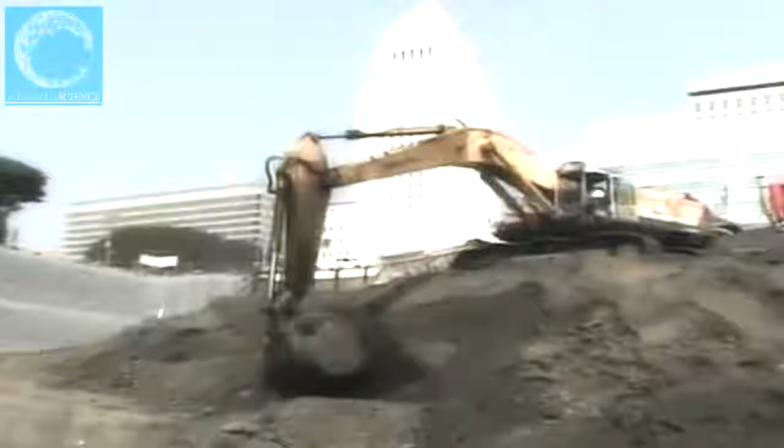Past year, 8 months, and 20 days, the builders of the new California Department of Transportation headquarters in downtown Los Angeles have been busy pouring concrete, erecting steel, and installing walls and windows. The massive 750,000 square foot office building looks almost completed from the outside, but the structure is still pretty naked on the inside.

It'll take another 7 months to finish installing the heating, ventilation, and air conditioning system and elevators. These are the things that make working in a large office building possible, even bearable.

Beyond the introduction of steel cage construction, no invention helped buildings, including our own, climb higher than the elevator. If we did not have passenger elevators, we don't have the modern multi-story office building because people won't walk more than 2 or 3 floors off the street to easily reach an office.

The Caltrans building will have 19 elevators to shuttle its 2,000 employees to upper floors. Kone Incorporated will soon begin installing them. But in the meantime, Clark Construction is running a temporary man lift to move workers and materials.

At the helm, Bobby Jeffers, man lift operator extraordinaire. Yeah, you see, you guys, this is a man lift operator's life. You're always getting loaded and you're always having your ups and downs. I've been running the man lift for 25 years all over Southern California. I've built hundreds of buildings. I'm the main person that brings everybody up. The job won't run without me.

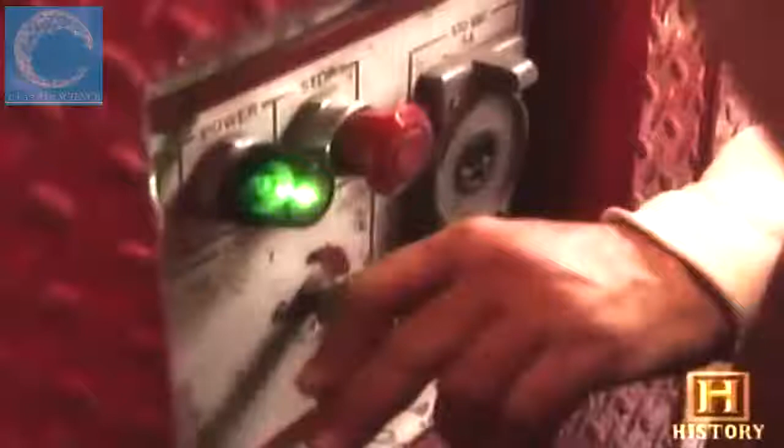The site uses an operator for a more efficient flow of materials.

Okay, if I take you down, can I get a nice smile out of you guys? Okay, you ready? Okay, hang on. Hang on, baby.

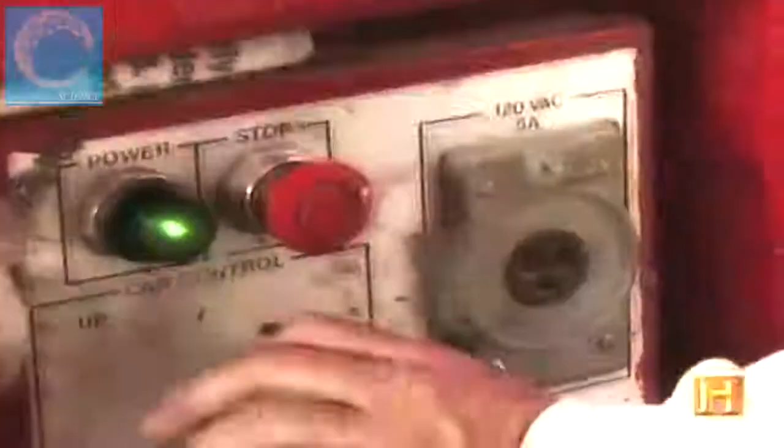Bobby's man lift will only operate until the first 2 permanent elevators are running.

Like most of the elevators used in high-rises, these are what's known as roped traction elevators. There's the elevator car. Cables are attached to the car, go up to the top of the shaft, and then over a pulley or sheave, and then back down the shaft to a set of counterweights to balance the car. Attached to the sheave is an electric motor, and when it operates, it turns the sheave or pulley, and the car goes up or down the shaft.

Okay, we are in the pit. This is the bottom of the elevator. At the Caltrans site, Ron Caborn with Kone Incorporated is responsible for getting all 19 elevators up and running.

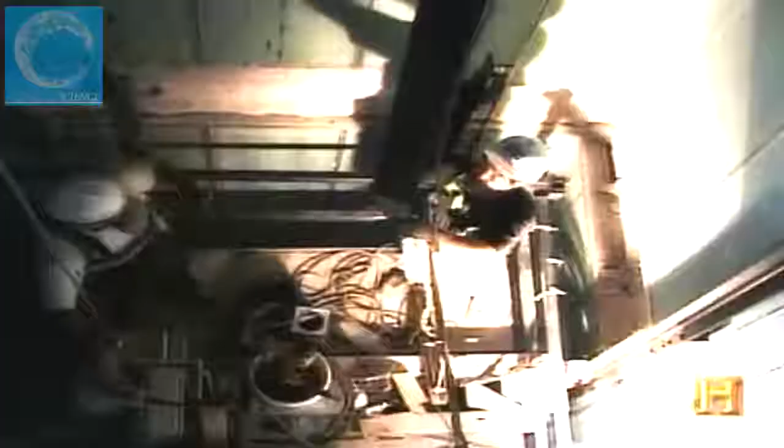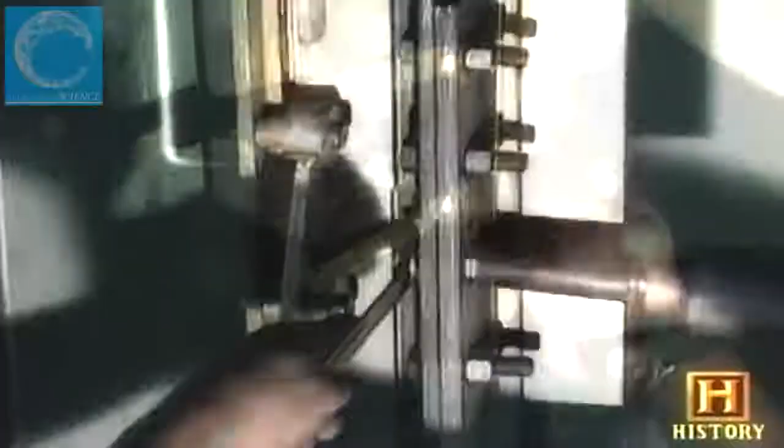The first step in the installation process is to attach the guide rails to the sides of the shaft. Our main part of the elevator is our guide rails. This is what the elevator travels on. It's very important that the guide rails are plumb.

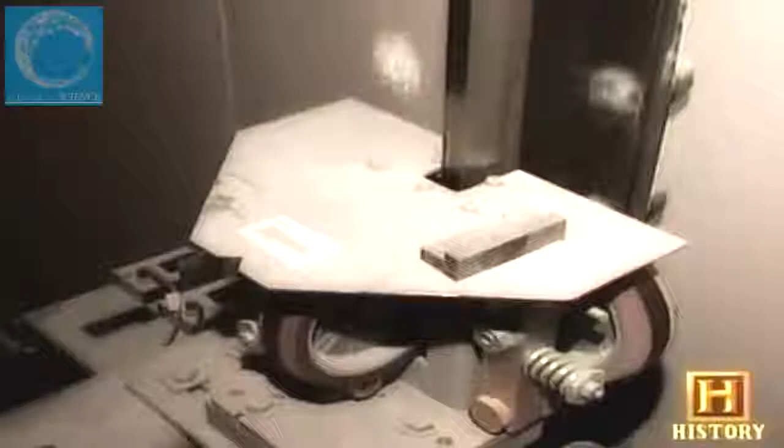Anything crooked in the rail, the faster the car travels, the more you'll feel it. These cars travel 500 foot a minute. It's not a real fast car. It's not real slow. It's kind of in the middle.

Electric traction elevators are the most prevalent. They're called traction elevators because it's traction between the motor sheave and the cables that lifts and lowers the car.

Okay, we are in elevator 17 machine room. This is on top of the hoistway. This is our hoist motor, which we have the drive sheave under here with the hoist ropes on it. As it spins, it picks the car up and down, counterweight up and down.

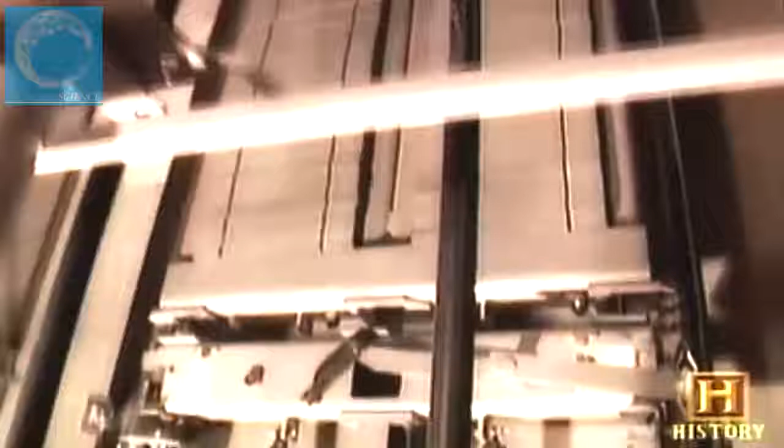The counterweight on this elevator weighs about 12,000 pounds. That's the weight of the car, plus 50% of the car filled to capacity. This helps ease the amount of work required by the hoist motor.

Right now we're roping up our cars using this elevator steel cable. We're starting out with the spools up at the very top, letting in one dead end all the way down, feeding it through our counterweight sheave. Then we're attaching it with our rope, and they'll pull it all the way back up to the very top where they put a shackle on it and hitch it up to the hitch plate.

The Caltrans job is going pretty smoothly. Then, one of the elevators hits a bump.

After successfully roping 8 elevators, the ropes from one have unexpectedly jumped off their sheave. Dangling over an open shaft, the engineers try to sort out the tangled ropes and get them back on the sheave.

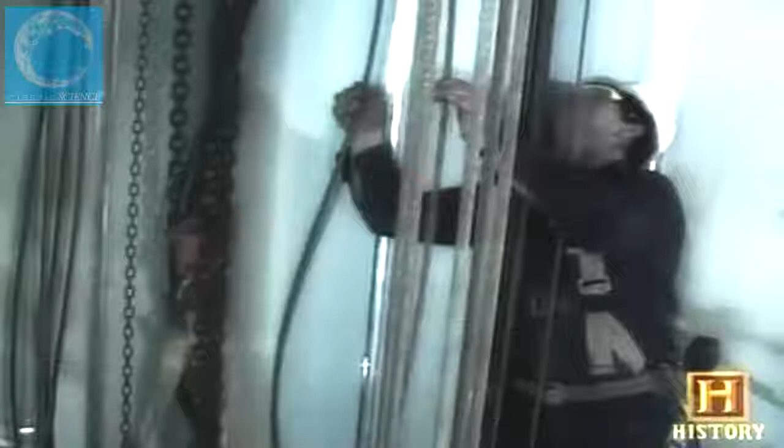Okay, this is 1. Yes. This is 2. Yes. Okay, establish the next one. Wait, this one I'm shaking. Look where I'm shaking, this one is 1. Let me spell it out to you. Grab the number 1 right here, put number 2 right here, so I can get 1 and 2 in order here, because I can't see it.

The engineers worked 2 days to sort out the problem. It was quite a project to fix it. We did have it all back up and running again. We noticed the ropes were damaged, so actually we have started replacing them. We have to put all new ropes in the car.

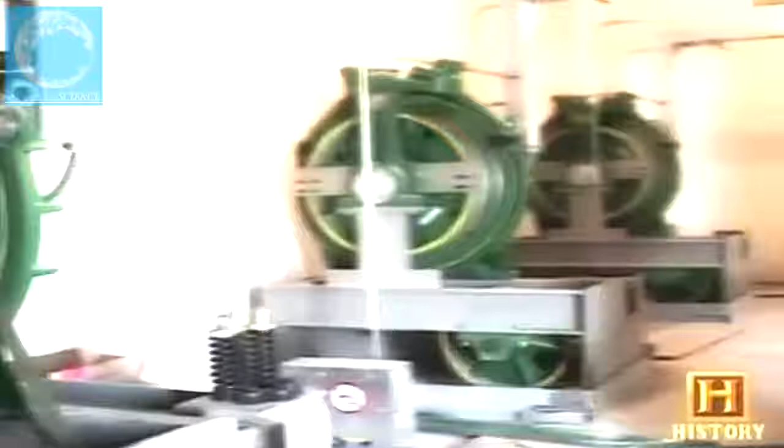Besides the hoist motor, the elevator computer, or controller, is also located in the machine room, above the shaft. This here is our controller. This is the brains of the elevator. It tells it what to do. It monitors what it is doing.

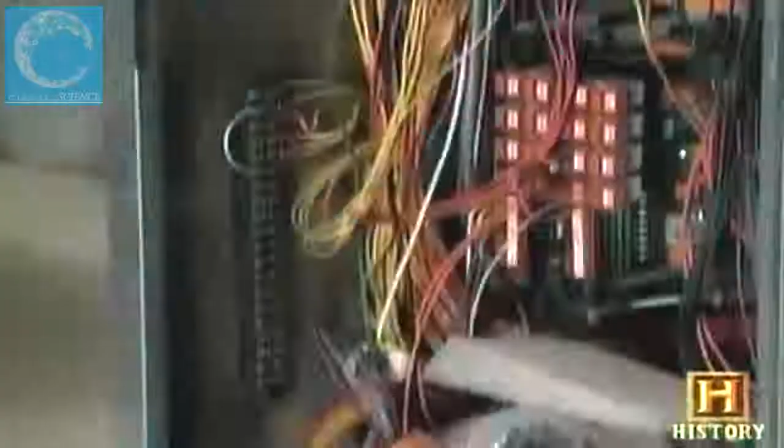The computer tells the car what floor to go to, when to open the door, and on some elevators, how much weight just stepped onto the elevator. And believe it or not, the door close button is actually connected to the computer. The controller also regulates the speed of the car.

One of the biggest fears people have about riding in an elevator is a sudden uncontrolled free fall. It's simply the misconception or misperception we have of elevators from television programs and movies where the cables are constantly breaking and the car plummets sort of helplessly down to the shaft. That is almost impossible given modern safety devices.

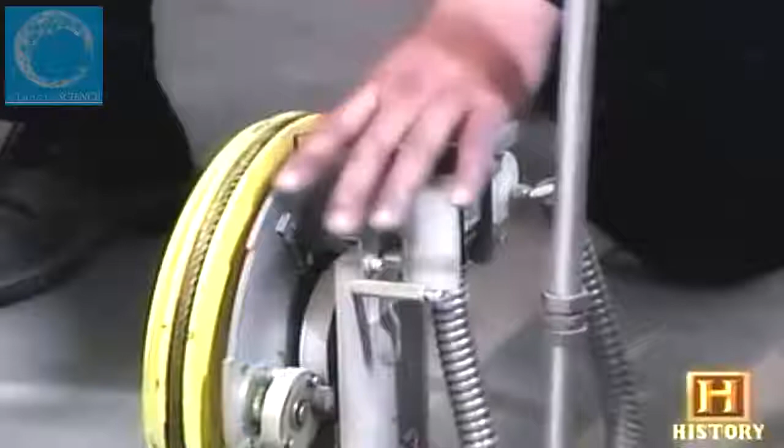One of those devices is the governor, which monitors the speed of the car. If the car were to fall and go faster than it's supposed to, it will recognize that and stop the cable from spinning.

There are also safety brakes under the elevator car, which clamp down on the rails to stop the car in the event of a fall.

If all else fails, there's even a cushion in the bottom of the pit. So we have a hydraulic buffer here. If the elevator were to fall down the hoistway for a short distance, this hydraulic oil buffer will catch the car. This thing compresses. The faster the car comes, the faster it will stop the car.

With all the safety mechanisms, there's really no need to worry about an elevator plummeting down a shaft. But that hasn't always been the case. Elevators used to be slow and sometimes dangerous, yet luxurious. Still, this economically uplifting invention would change the rules of real estate.

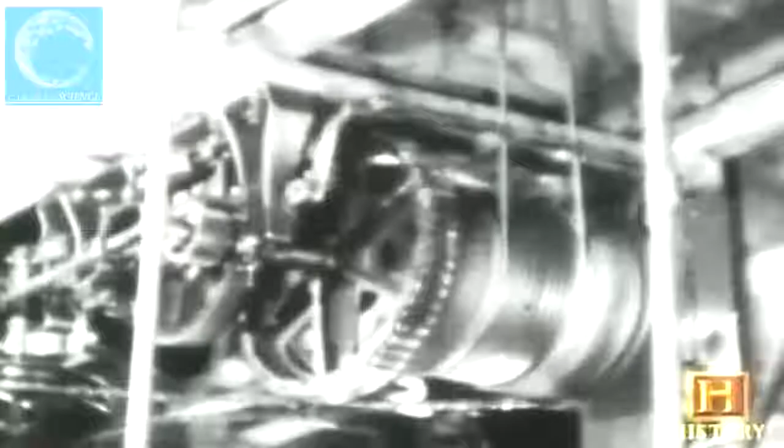The benefits of elevators were clear, but several deaths caused by freight hoist accidents proved elevators weren't yet safe for transporting passengers.

Enter American inventor Elisha Graves Otis. In 1852, Otis installed the first hoist with a safety brake in a factory. The following year, Otis demonstrated his new invention to the public at the Crystal Palace Exposition in New York.

He would have the platform lifted up, and Otis would be standing on it, and then someone would cut the hoisting cable, and the car would fall, and then his improved brake would catch and stop the elevator car, and he would be safe. Spectators were astonished.

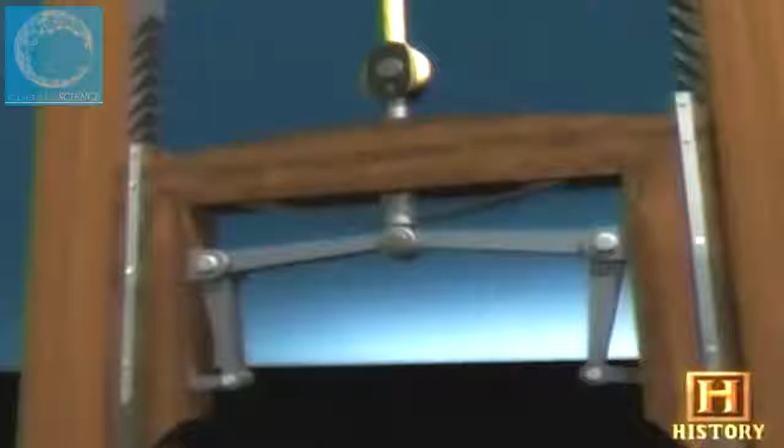The Otis safety brake consisted of 2 wrought iron catches on the car and cast iron teeth on the guide rails. If for some reason the hoist rope broke or slipped, a spring tripped the catches, forcing them into the teeth on the sides of the shaft, stopping the fall.

This simple but ingenious device made elevators safer for moving passengers.

Soon, the first passenger elevators started appearing in department stores and luxury hotels. The elevator was introduced as another luxury item, literally as a movable room with upholstered seats, mirrors, chandeliers, and an operator. It was that gracious moving room that carried patrons of the hotel from floor to floor. But the elevator quickly changed from luxury convenience to economic necessity.

The new invention now made taller buildings feasible, altering the economics of real estate forever. Developers soon realized the new elevating device could also elevate office rents.

19th century New York's primary mode of transportation was horses. Because of the horses and other activities, there was a lot of dirt, noise, and smells, and being above that had an obvious advantage. With an efficient means of getting people to upper stories, the top floors, which previously had been less desirable, suddenly became the most valuable space.

The first commercial office building to employ an elevator is the Equitable Building in New York City, completed in 1870. The trip from the ground floor to the 9th floor, the top story, took just under 2 minutes. The business community was highly skeptical because this was a slow and gracious device placed into the fast-paced world of American business. There was a recognition that the elevator had to change if it was going to be successful, and it doesn't take too long before the seats begin to disappear and the elevator starts to move much faster.

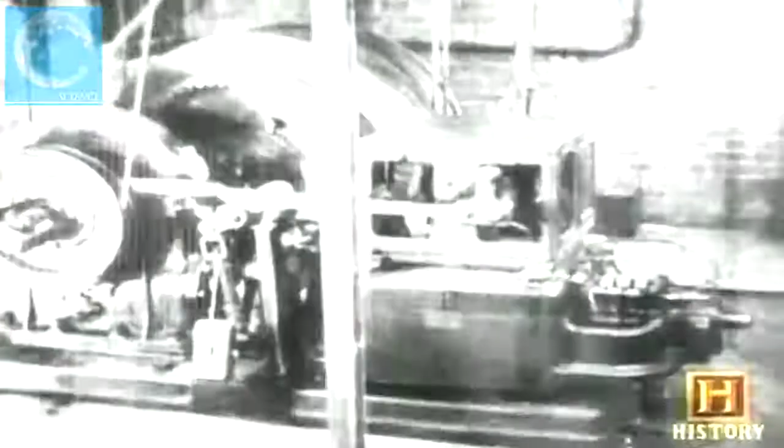Over the next 60 years, not only did elevators become faster, but safer and more reliable. Electric traction motors took the place of steam engines. The first push-button automatic elevators started appearing in the 1920s, making elevator operators obsolete.

There was a surprising amount of skepticism about operatorless elevators. People did not want to run them themselves. They viewed this as too complicated, which sounds very strange to us because they looked the same. Many elevators had buttons very similar to today. Today's elevators are a far cry from the slow, moving rooms of the past.

Elevatoring is probably the most important thing for a very tall building. If you don't get the people up there, you don't have a building.

Builders of the new Taipei 101 in Taiwan faced greater challenges than normal when designing the ultra-sophisticated elevator systems for the world's tallest building. In a structure this large, just getting people in, out, up, and down presents unique challenges.

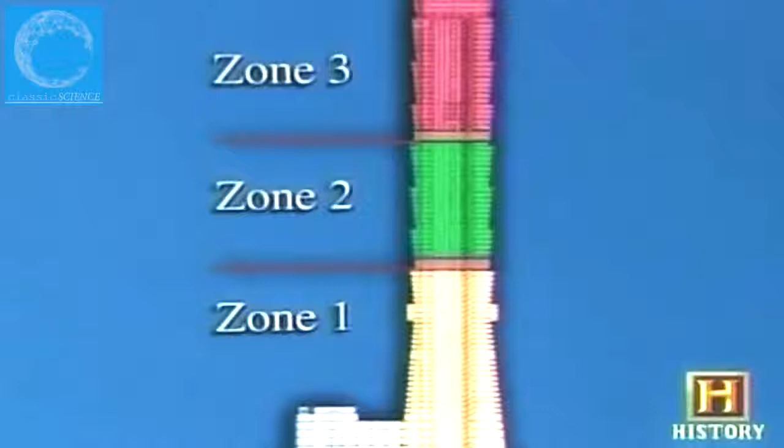We know it's important to transport these people to the floor they intend to go to in a short time. Therefore, we divided the vertical transportation system into 3 zones in order to make transportation go more smoothly.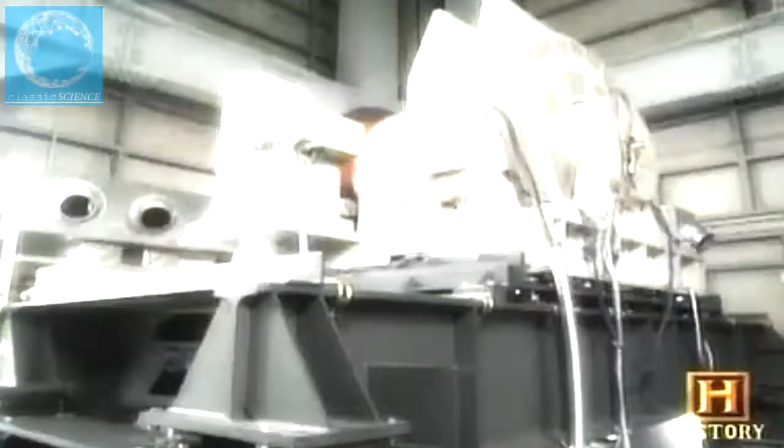First of all, we must have a very powerful motor. Secondly, we need a little damper in the cab so that it will not move around too much. Under each cab is a vibration balancing system, which uses sensors to quickly move weight back and forth to counteract vibrational forces.

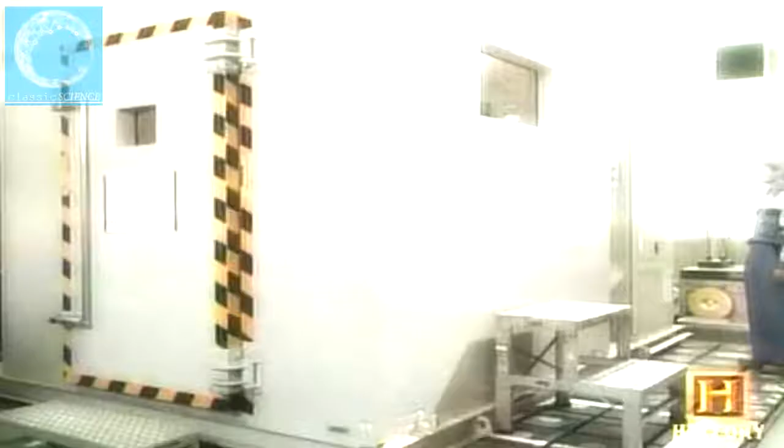Thirdly, we need to pressurize or depressurize the cabin in order to give people a more comfortable feeling on their ears. Pressure chamber testing helped determine what was comfortable. The 2 express elevators move so fast, they're pressurized on ascent and depressurized on descent. To avoid a sudden change in atmospheric pressure, each cab has a high-pressure blower and exhaust release control system.

Engineers on the Taipei 101 have pushed elevator technology into the stratosphere.

Back in Los Angeles, the elevator mechanics are making good progress on the Caltrans building's 19 elevators. After 4 months, the first 2 are already up and running.

They make Bobby's rig obsolete.

Last week, Friday, right? Yeah. Are you gonna miss me? Oh yeah, everybody's gonna miss you around here, Bobby. This guy's worked with me since back 20 years ago. He come in the elevator and said, hey, what?

After 42 years in construction and 25 years as a man-lift operator, Bobby's retiring.

Friday will be my last day, January the 16th. 42 years, it's all been good. I've helped put a lot of buildings up. I've brought a lot of cheer and made a lot of guys feel good about themselves. And it's been great, I'm gonna miss everybody. They all been like my second family.

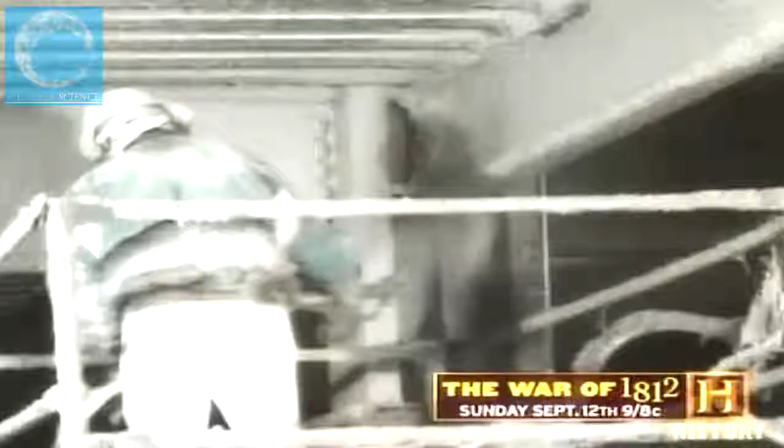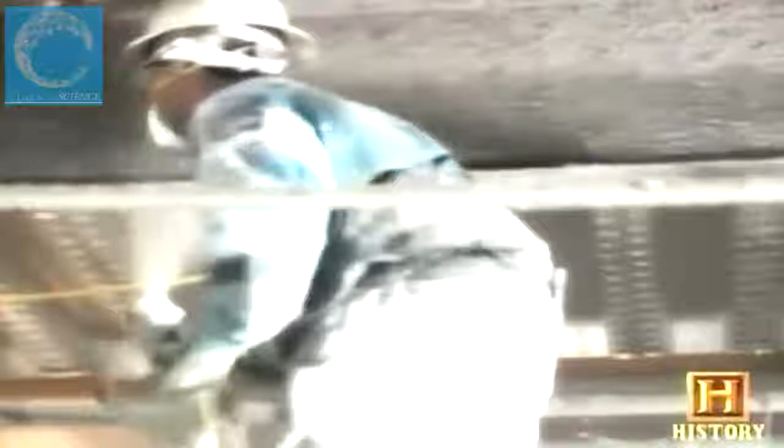One way engineers protect the structure of a building is to apply fireproofing to the steel skeleton. On the Caltrans building, fireproofers spray a coat of Monokote MK-6 on the exposed columns. It's a gypsum-based, cement-like material that goes on wet and dries to form a hard shell. In the event of a fire, the fireproofing material will help insulate the steel from heat.

A fire in a building can easily reach 2,000 degrees. The structural steel starts to lose its strength around 1,000 degrees, and therefore steel isn't actually any more fireproof than, let's say, a wood structure is.

Fires have been the bane of civilization for centuries. Fires spread easily between buildings, which were densely constructed, and most often made of combustible material, such as wood. American cities were no exception.

People were very concerned about fire in the 19th century because they had the experience on more than one occasion of major cities burning down. We don't have that today, but they had the Chicago fire. New York burned twice in the 1830s and again in the 1840s. Boston had a major fire. Baltimore had a major fire.

As early as the late 18th century, architects had begun the quest for what they hoped would be a fireproof building. That's the first time we see builders trying to construct buildings without using any combustible materials. And that's what fireproof meant: buildings constructed without using any combustible materials.

Unfortunately, the Great Chicago Fire of 1871 showed that merely using non-combustible materials, such as masonry or cast iron and steel, still left buildings vulnerable.

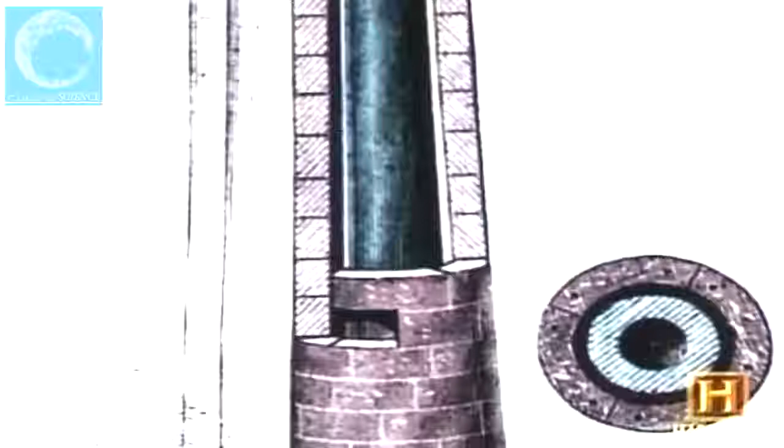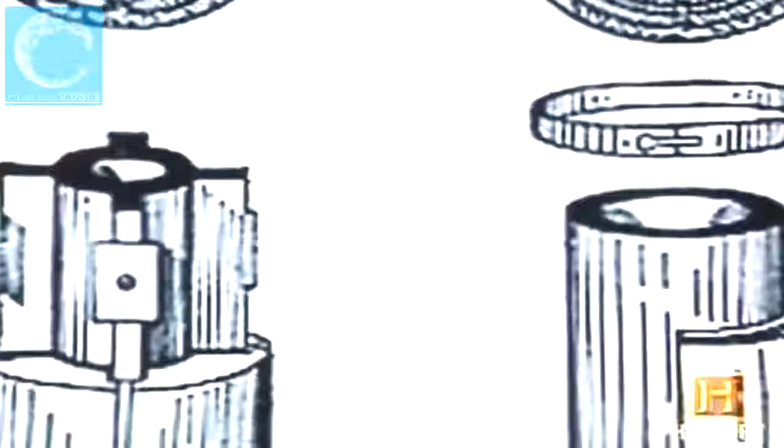When it was discovered that the structural metal buckled or was damaged by high heat, the idea that it too had to be insulated from the heat led to the introduction of materials to protect structural metal. Builders started encasing columns in terracotta, fired clay, to protect the structural members from heat during a fire. Later, engineers slathered plaster or concrete over wire to protect structural iron and steel members. When properly designed and implemented, these early fireproofing methods worked well.

It wasn't until the 1950s that the first spray-applied fireproofing was introduced. But one of the ingredients of the early spray-on fireproofing posed a hidden danger: asbestos.

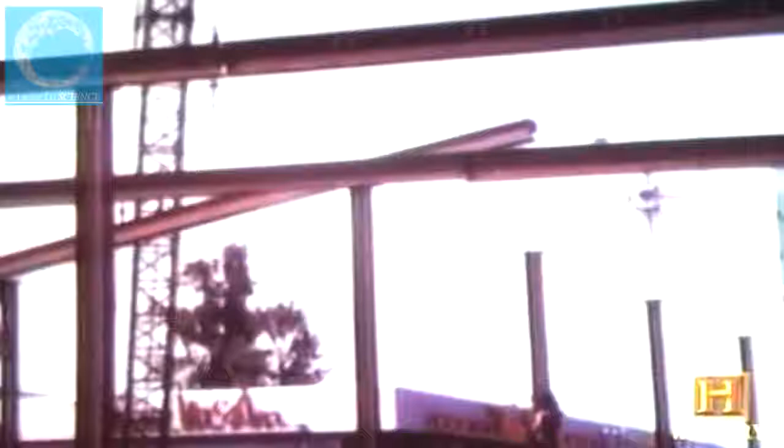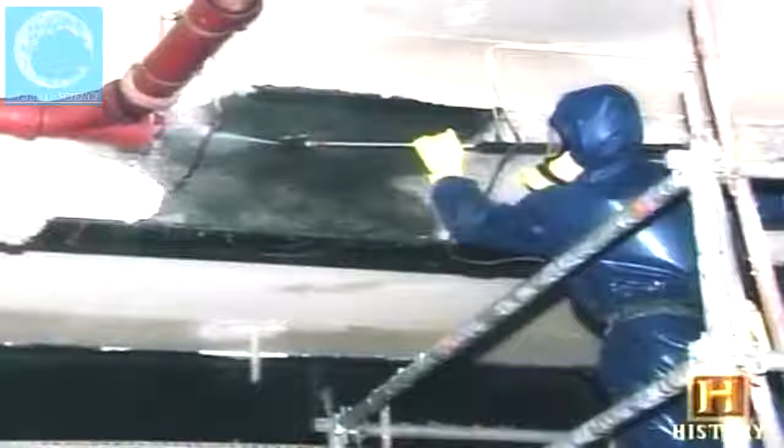Asbestos is a mineral which was used extensively in many products because of its fire-resistant qualities. It turned out that the asbestos versions of spray-on adhered to the steel very well. And asbestos is a known fireproof material, which is why so much of the early fireproofing is laden with asbestos, because it was, in the 1950s, the best material they had, and they didn't yet know about the medical problems with it. Studies showed long-term exposure to asbestos increased the risks of lung cancer.

In 1973, the spraying of asbestos-containing material was banned. And therefore, the fireproofing we're spraying on the Caltrans building doesn't contain any asbestos.

Fireproofing is meant to protect the structure during a fire, and as a result, save lives. But occupant safety hasn't always been the primary concern. Over the past 140 years, the emphasis on the protection of property during a fire has shifted to an interest in the preservation of life.

In the 1860s, when some kind of supplementary egress was first required in New York, most inventors came up with block and tackle devices that people were supposed to use to lower themselves out of their windows, or chutes. So there are dozens and dozens of patents for totally weird and ridiculous things.

External fire escapes first appeared on tall tenement buildings and factories with heavy concentrations of people inside. But one horrific fire proved how inadequate the flimsy, poorly maintained, and rarely used outside fire escapes were. The most deadly factory fire in New York history occurred at the 10-story Asch Building in Greenwich Village on March 25, 1911.

Hundreds of people, mostly immigrant women, were at work at the Triangle Shirtwaist Company, making clothing, when a fire broke out. There were so many combustible things in that building, it was probably like an explosion. It spread very quickly and people could not get out from the stairways.

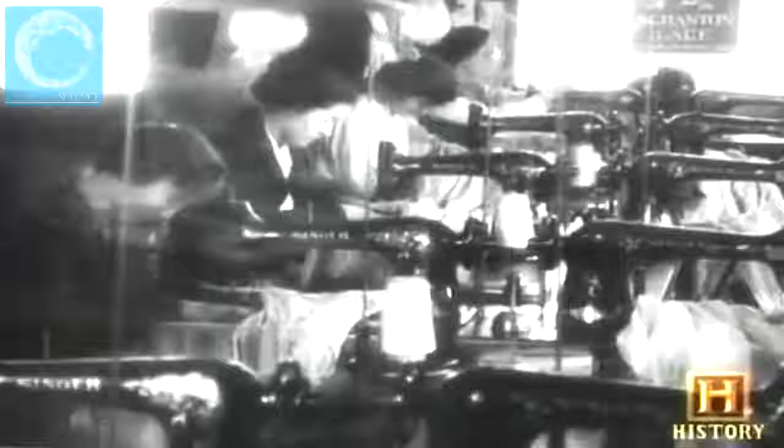The horrific fire sparked changes in health and safety legislation, including factory fire codes and labor laws. Today, a building's life safety systems are as important as any facet of design.

Computers can help engineers design ever more efficient life safety systems. It's called Fire Dynamics Simulator. It was developed by the U.S. government for modeling these fire scenarios.

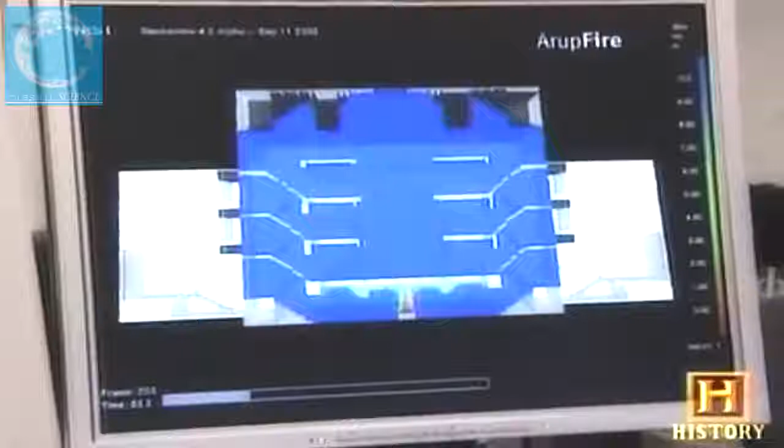It lets you build a building and then put a fire in, put systems in like sprinklers or smoke control, and then basically model what will happen during an emergency event and see where the smoke will go, what the temperatures will be like.

The life safety systems on the Caltrans building include 7,500 sprinkler heads, fed by 21 miles of pipe. It's not like the movies where one goes off and everything in the building starts getting flooded. Most sprinkler systems activate based on heat, so that the sprinkler that actually heats up will fuse and activate, while all the sprinklers that are further away, if they're not heated, won't be pouring water down.

But the sprinkler system isn't the only emergency system. There are also 2 active smoke control systems. Behind us there's some stairwell pressurization, which is basically a safety in case there's a fire. It pressurizes the stairwell, keeps it locked tight so no smoke can get in while people are evacuating the building.

Another system inhibits smoke movement between floors. When smoke is detected on one floor, that floor becomes negatively pressurized relative to adjacent floors, in essence creating a pressure sandwich that isolates the smoke and heat on the fire floor.

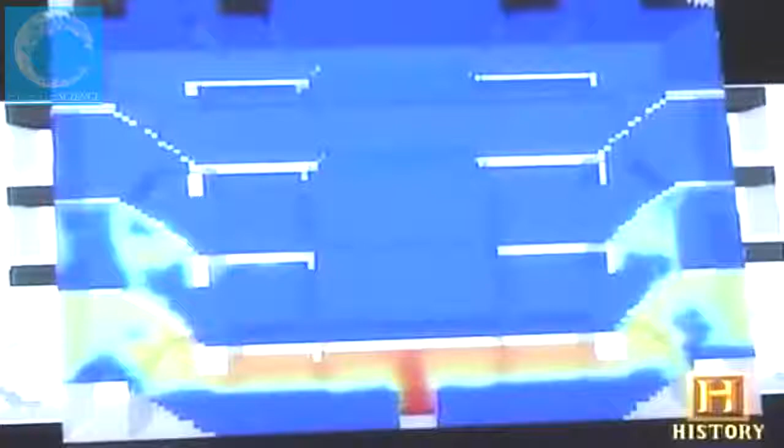Life safety engineers hope their systems never have to be used. But by applying the lessons of the past and implementing today's technology, they're helping ensure there is a tomorrow for those stuck in a building during an emergency.

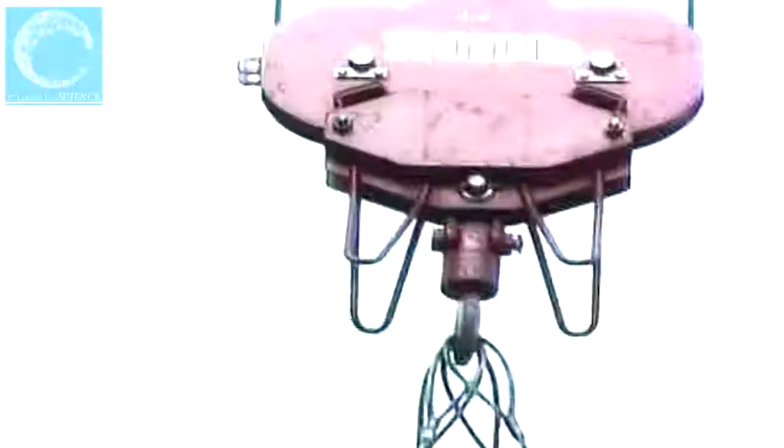One of the most sophisticated systems in any large building is the heating, ventilation, and air conditioning, or HVAC system. Keeping the 750,000 square foot Caltrans office building cool in sunny Southern California is going to be quite a chore, requiring thousands of tons of equipment and 20 miles of ductwork.

Comfort is incredibly important because when people are in an uncomfortable environment, people are less productive. Arup is the mechanical engineering company on the Caltrans project, responsible for designing the systems that keep people comfortable.

Comfort is a combination of things: temperature, relative humidity, and air quality itself. These are the key components of comfort through the eyes of the mechanical building engineer.

Like every other party involved with the design of the building, mechanical engineers rely on computer software. It's a computer-aided drafting tool, two-dimensional. What we start with here is a typical building layout. Here is the ductwork, the air conditioning ductwork layer, and on top of that we can start to add the lights, sprinkler heads, those sorts of things.

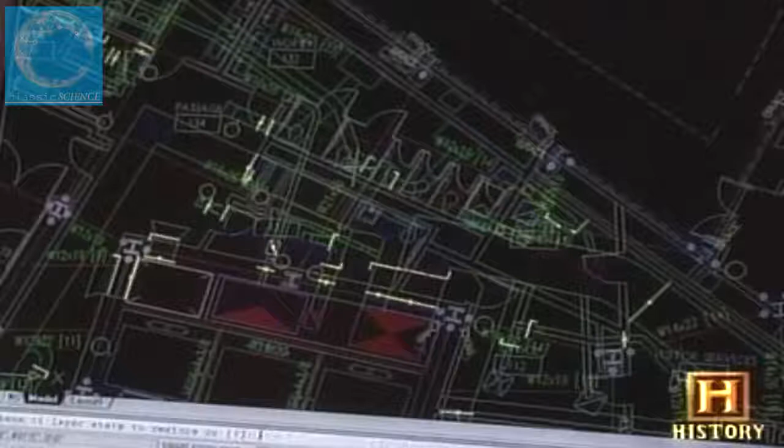For complex systems, the mechanical engineer sometimes builds a 3D model to better visualize the way all the components work together.

These tools are helping mechanical engineers design even more efficient systems. We have taken the idea of indoor environmental control from a concept that was once considered the realm of the gods, something impossible to do, to the point now where it has become so reliable, so quiet, so inexpensive, and so hidden that most people think heating, ventilating, and air conditioning is nothing more than a thermostat on a wall.

Before the 20th century, climate control was just a dream. For thousands of years, the only product people had to keep them cool was ice. But ice was primarily a seasonal luxury.

By the 19th century, American entrepreneurs started harvesting ice in the winter and storing it in insulated ice houses for consumption in the summer. An iceman delivered the cold commodity door to door, but the ice was used in ice boxes for food preservation, not for room cooling.

Engineers from the Navy Department decided to adapt a recent invention for keeping food cold. Their device had a cistern filled with water and shaved ice. Ice water trickled down through a perforated metal pipe onto 36 terry cloth-wrapped rollers. A fan at one end blew air over the saturated rollers, then through ducts and into the president's room.

At the same time, engineers tried to reduce the humidity by placing a large box filled with ice on the outflow side. Engineers believed the water vapor would condense out of the air because cold air can't hold as much moisture as warm air. They called it air cooling, but in effect they were hitting on exactly what it is that makes for modern air conditioning - that is, control of both humidity and temperature at the same time.

For 11 weeks, the device helped to comfort Garfield, but it wasn't enough to save him. He passed away September 19th, 1881. The problem is it required 4 tons of ice a day to operate, a prohibitive amount even for the White House. It wasn't until the turn of the 20th century that air conditioning as we know it was born.

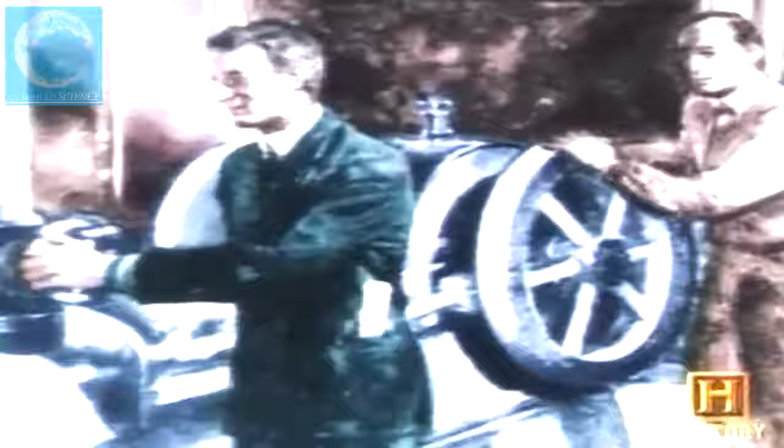Willis Carrier was asked, as an employee of the Buffalo Forge Company, to design a system which would control the humidity in the summertime at a printing plant so that the colors would properly register. What he did was come up with a system which used a combination of cold well water as well as a mechanical refrigeration system to cool the water and then dehumidify the air. That system Willis Carrier developed started him on a journey which led to his ultimately being called by many people the father of air conditioning.

In 1904, Carrier applied for a patent for his apparatus for treating air. His device both cooled the air and controlled the humidity. His subsequent work formed the basis for air conditioning that is still used today.

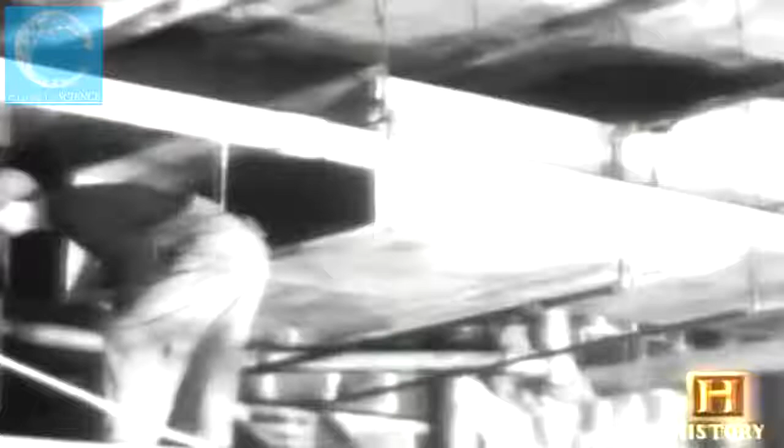Movie theaters were among the first large structures to adopt the new technology. However, the expense discouraged new office buildings from quickly following suit. One of the first high-rises to employ air conditioning was the 36-story Philadelphia Savings Fund Society, or PSFS building. Howe and Lescaze in Philadelphia in 1932 designed the PSFS building, which is the first modern, fully air-conditioned structure.

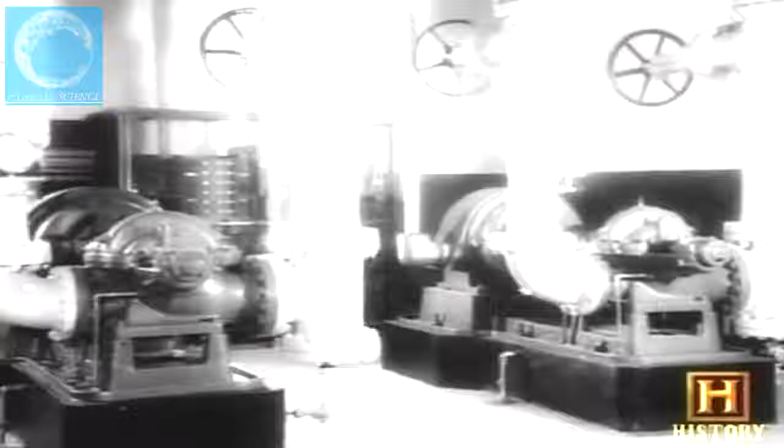Air conditioning continues to develop, but it's that moment when the tall building is free to be completely sealed up. Beyond not having operable windows, the PSFS building had dropped ceilings to conceal ductwork. It had mechanical rooms on several floors to reduce the space required for vertical ducts. Engineers even hid the building's unsightly cooling equipment behind the distinctive PSFS sign on the roof.

Even the Empire State Building, constructed just a couple of years before the PSFS building, didn't have air conditioning until 1950. The pioneering techniques first employed by the PSFS building are still being used today.

The buildings constructed after World War II presented even greater challenges for climate control engineers. The tremendous use of glass as a popular cladding made keeping interiors cool more difficult. Fortunately, the development of more efficient HVAC systems, tinted glass, and window coatings ensured occupants wouldn't bake inside the glass-encapsulated buildings.

At our building in Los Angeles, the first truckload of air conditioning equipment has arrived. The building's about to get a whole lot cooler.

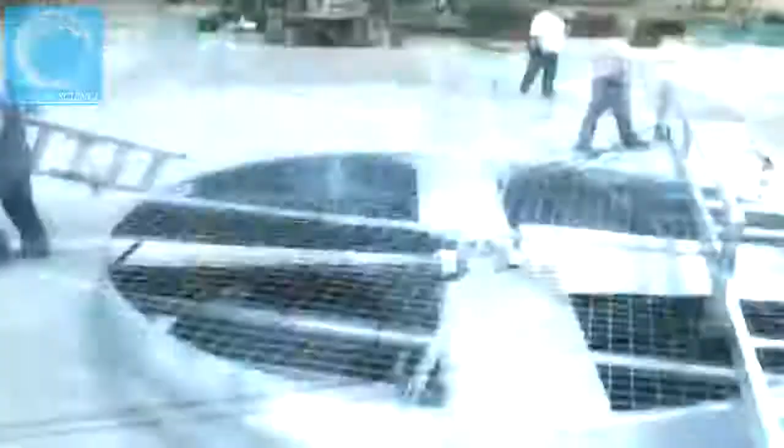At our Caltrans building, the Scott Company is the mechanical contractor responsible for installing the systems the mechanical engineer has designed. To cool the building, Scott Company will install 3 massive Carrier chillers, the largest being 30,000 pounds. This is the mechanical room - this is where, in my opinion, the heart of this building lies.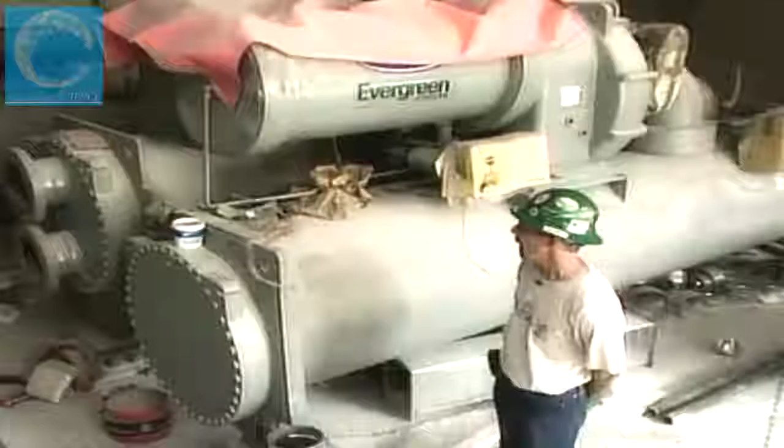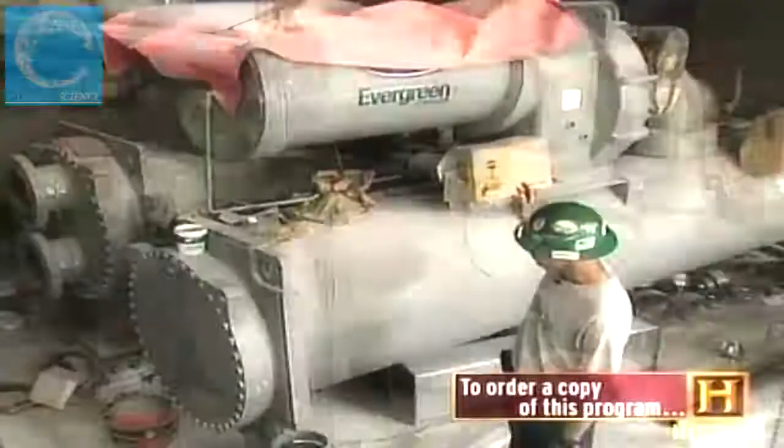These are chillers which, if you were to think about it, are giant air conditioners. All of the cooling abilities of this building basically come from these 3 units right here. The water is pumped into these chillers, is cooled, and forced out to different areas of this building to keep its occupants cool.

This process chills water to 44 degrees. The chilled water is then pumped to air handlers. This is the air handling unit.

Basically what happens is the cooled water from the chillers or the heated water from the boilers comes into these connections, and over here we have a coil. The water runs through this coil, through these loops, whether it be hot water or cold water. The air, which comes from this fan over here, after being drawn through a series of filters, comes over this way, goes over the coil, and the air is either heated or cooled and goes through the building to provide either cold air or warm air for comfort.

The ductwork routes the air and takes it to where it needs to go. Steve Hinson is handling the installation of the ductwork.

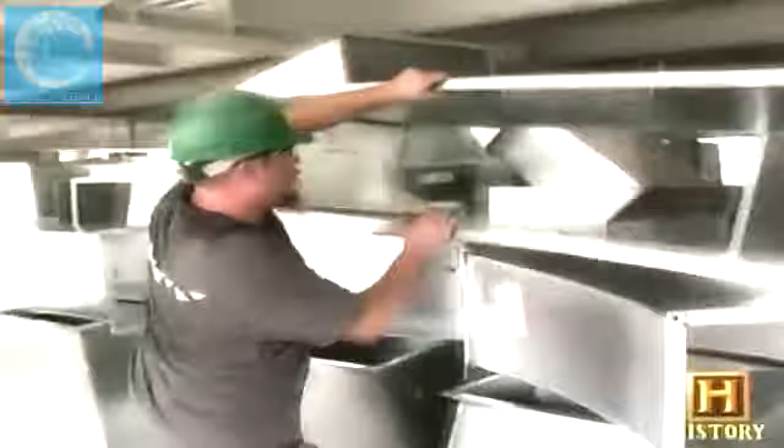Each one of these pieces has a number on it, and that number correlates with the drawing, showing exactly where that piece goes. Scott Company will eventually run 20 miles of ducts.

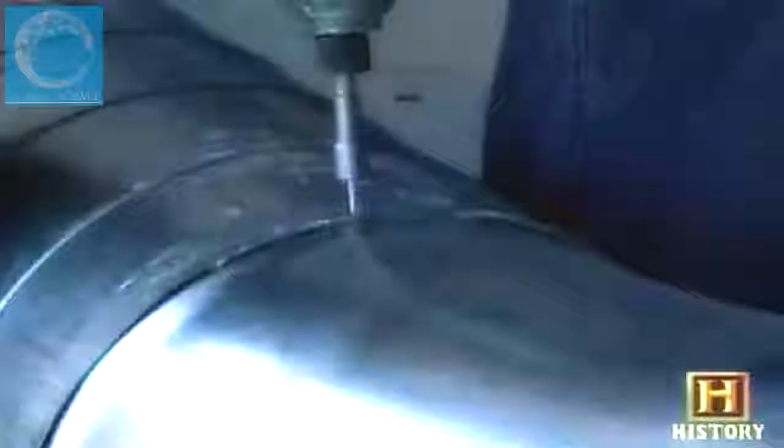This is actually the biggest job I've ever run. It's a real big job, and a lot of guys really don't think I should run a job because of how young I am. I'm only 30. All eyes are on me right now. This job will either make me or it'll break me. And hopefully it makes me.

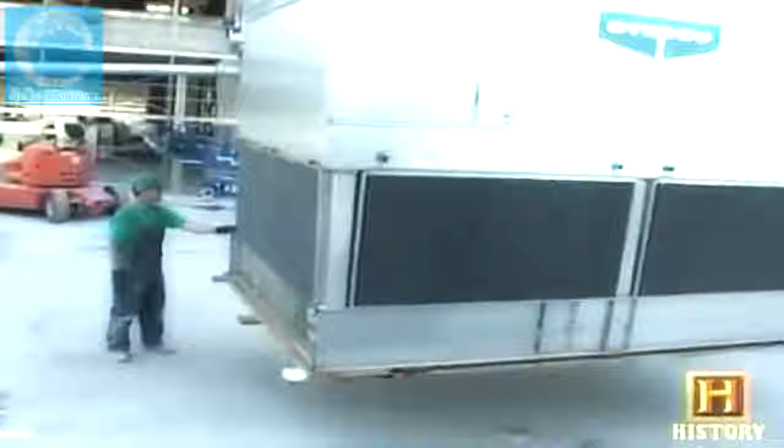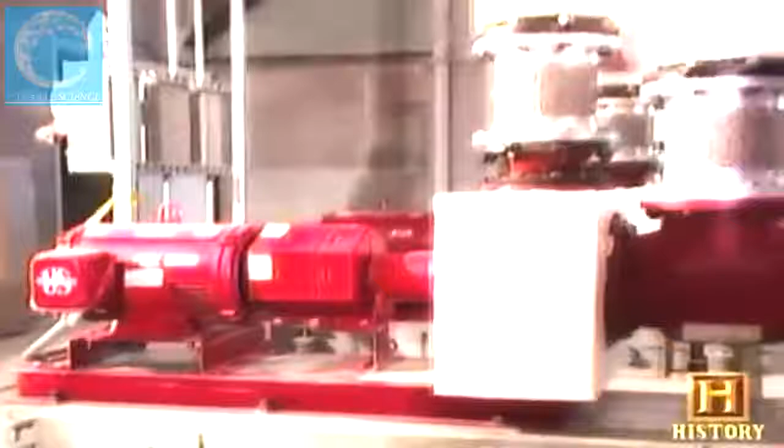The 3 massive chillers that will cool the structure will also generate a tremendous amount of heat as a byproduct. So Scott Company is installing 4 cooling towers on the roof to take heat away from the chillers. Water circulates around a chiller to draw heat out of the machine. This condenser water, which is now hot, is pumped via 18-inch pipes to equipment on the roof.

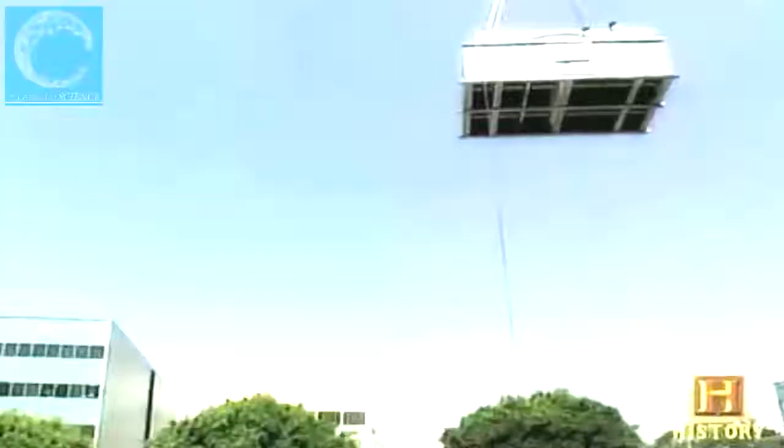Basically what we have here is the fan section of the cooling tower, or the top section. The water comes in here on this PVC and is distributed amongst these nozzles. The nozzles spray the water out in a light pattern. A fan pulls air up through the saturated baffles, cooling the water. The cooled water is then sent back down to the chillers to be recycled through the system.

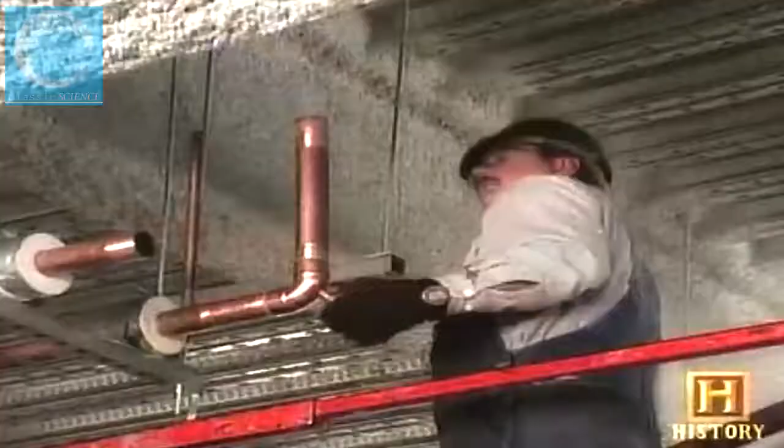To provide heating in the building, Scott Company is installing 3 boilers. The boilers heat water, which is then pumped throughout the building to variable air volume boxes. Each VAV box services 4 or 5 offices. Inside the VAV boxes, coils transfer the heat from the water to the air, which is then forced into the offices via the same ductwork as the air-conditioned air.

But creating a comfortable environment is about more than heating and cooling. The V in HVAC stands for ventilation. Ventilation is a very important aspect of the design of mechanical systems. It is the process through which you intentionally bring in air from the outside in order to remove or displace the pollutants that exist within a building - pollutants like carbon dioxide, ozone, formaldehyde, and other substances like that.

The air handler units bring in fresh air and mix it with return air from the building. Ductwork then carries the conditioned air into the offices.

So we finally outfitted this empty shell with elevators and cooling equipment.

You don't belong here. Just throw the stuff out. Look at all that stuff. All right, just throw it out.

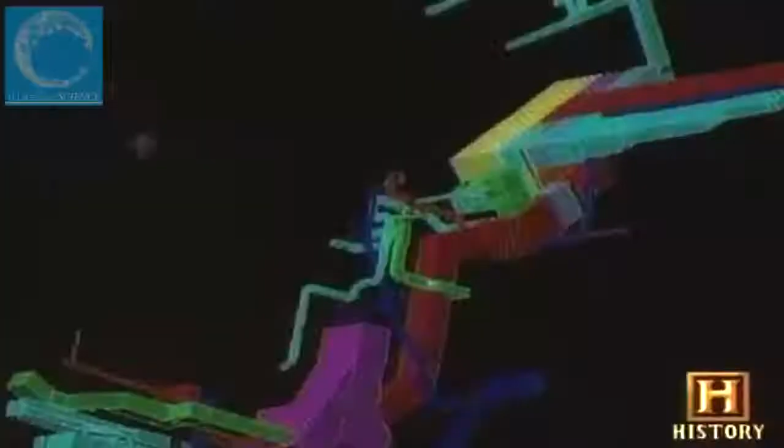The complex labyrinth of shafts, pipes, and ducts connecting every sector of the building like a giant web is representative of the diversity of experts it takes to create a safe, convenient, and comfortable human environment.

And one of those experts who helped get this building up is retiring today.

Good day there. Enjoy your ups and downs with all the guys. Take care of them. Take care of the car. Bye, Bobby. Good luck. See you later.

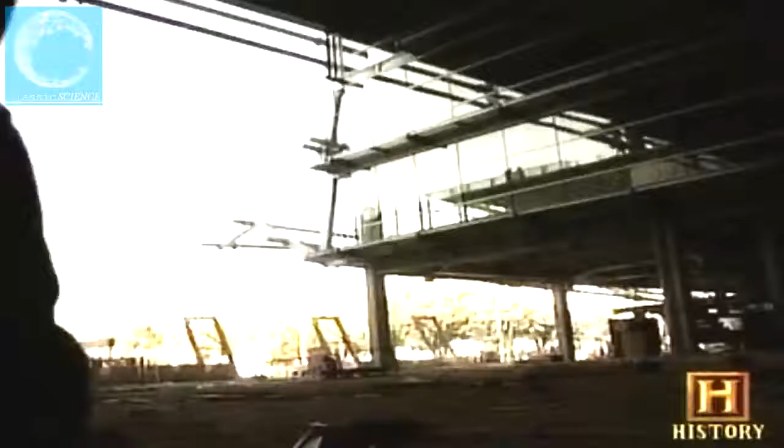It's a fundamental belief of ours that great buildings are made out of the unselfish collaboration of all the different parts. Watching the building go from the ground all the way to the top and meeting a bunch of good people on it, looking back, you know, to be able to tell my family, hey, you see that big tall building? Your dad worked on it. And it's exciting. From now on, the Caltrans building will have to manage its own ups and downs.